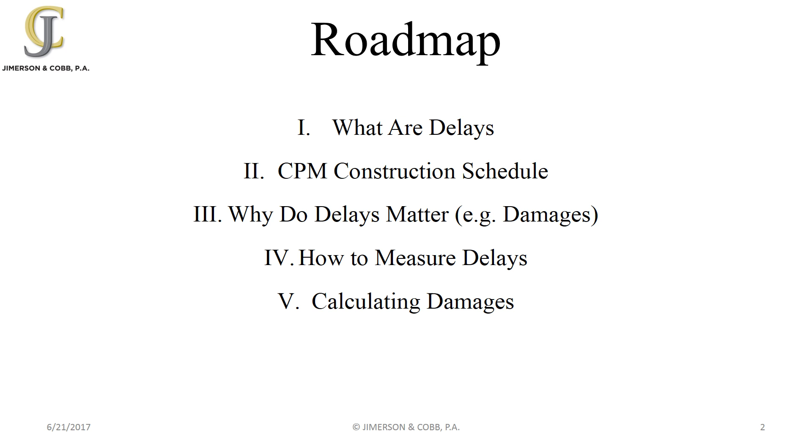Next, we'll examine why delays matter, basically time and money. Then we will endeavor to measure delays and look at the different analysis mechanisms that are available. Finally, we'll get to calculating damages and all the aspects that go into it.

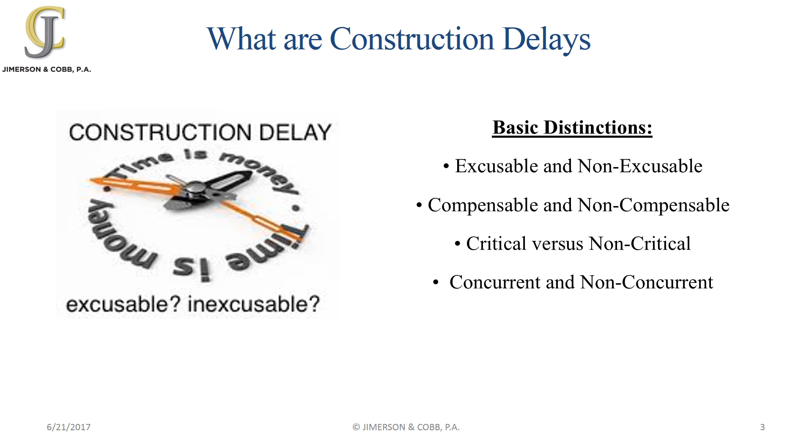So what are construction delays? At the basic level, there are different nuanced distinctions. First, is the delay excusable or non-excusable? You then look at whether it's compensable or non-compensable. A delay is either critical or non-critical, and that makes all the difference. And then, is a delay a concurrent delay or non-concurrent delay? We'll look at each one of these distinctions.

First, an inexcusable delay. This is a delay caused by a party to the project. If you cause a delay, it's inexcusable. You're not going to be compensated for the delay. You're not going to get time, you're not going to get money. In fact, if you cause an inexcusable delay, you're likely subject to a delay claim, such as liquidated damages or an actual damages claim.

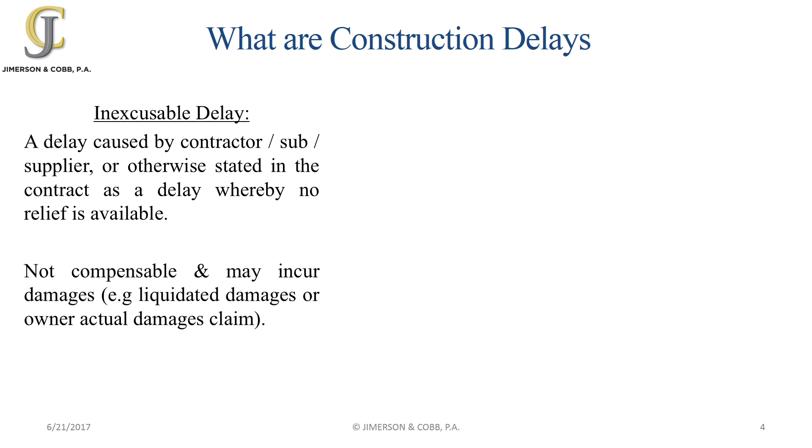Some examples of an inexcusable delay: failure to manage the schedule, inadequate manpower, poor quality, poor safety. You can sum it up to poor performance. If your poor performance causes a delay, it will be an inexcusable delay.

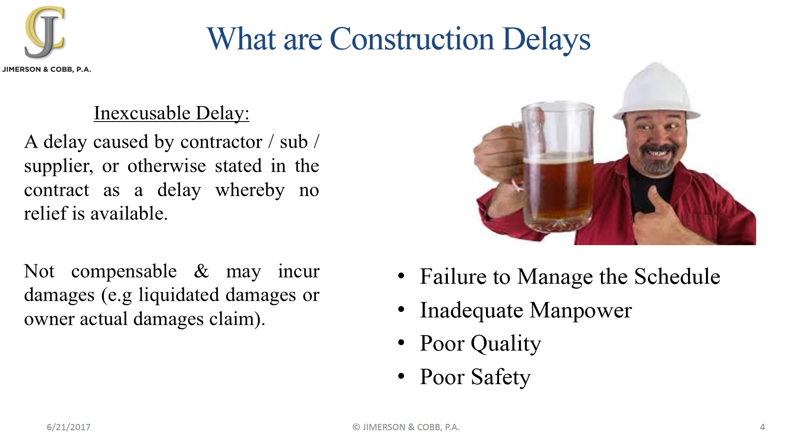Excusable delays are those that are beyond your control—someone else or something else caused it. A classic example is force majeure, such as acts of God, fires, floods. If the owner makes a substantial change to the project that causes a delay, that's excusable. Errors and omissions in the plans given to the contractor by the owner, if those cause a delay, that's an excusable delay for the contractor. Concealed, unforeseen conditions that cause delay are excusable, and most of the time intervention by outside agencies that cause delays will be excusable.

For excusable delays, you're typically going to find that the contractor is at least entitled to additional time. It may not be entitled to additional costs. As we'll see later, it comes down to the contract terms. If an excusable delay occurs on the project, the owner won't be able to assess delay damages against the contractor.

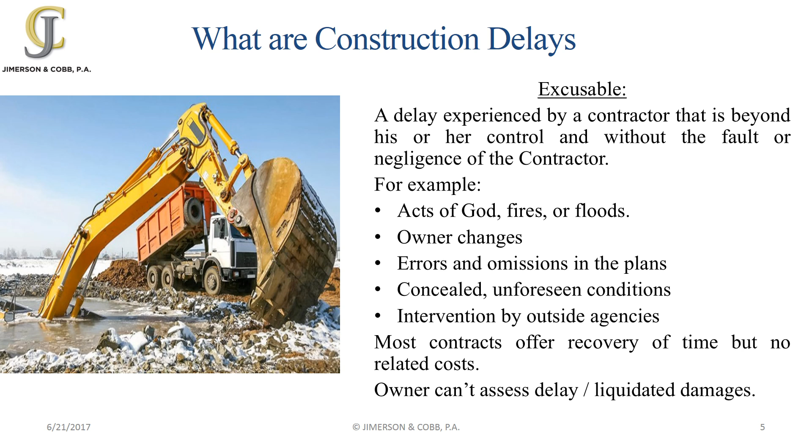A delay claim is either compensable or non-compensable, and we're talking about money—is the party going to have a money damages claim arising from that delay? Your typical non-compensable delay is the type that was beyond the control of one of the parties. So going back to force majeure, acts of God, neither party caused that delay, so you'll typically find those delay claims are non-compensable.

On the other side of that coin, compensable delays—those where a party can seek damages—have some complicated facts they have to prove to support that claim. First, it was a delay caused by the party receiving the work. So if you're the contractor, the delay was caused by the owner. If you're a subcontractor trying to sue the contractor, the delay was caused either by the contractor or the owner.

Next, you have to show that the delay actually impacted the critical path. As we'll see later, delays that don't delay the critical path have no effect. You then must show that the delay was a proximate cause of extra costs. So there's two prongs there: the delay had to be a cause of the costs, and the costs were extra costs that you would not otherwise have incurred but for the delay.

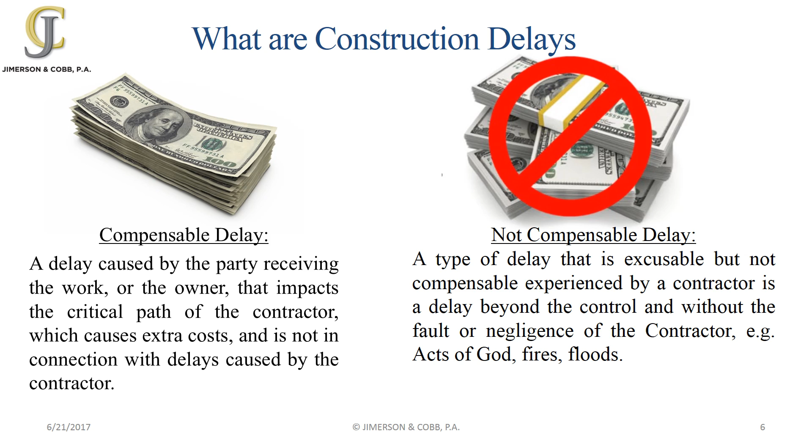And finally, you must show that the delay was not in connection with delays caused by the claimant, the person bringing the delay claim. If they had any fault in causing the delay, they will typically not be able to recover on the claim.

This is a nifty flow chart explaining what we just talked about. Starting at the top, working your way to the bottom. At the bottom, where it says assess delay, that's your money damages delay claim.

So first, was the delay excusable? If it was the type of delay that's non-excusable, there will not be a claim for time or money. If the delay was excusable, is it compensable or non-compensable? If it's compensable, then you've got a claim, likely for time and money.

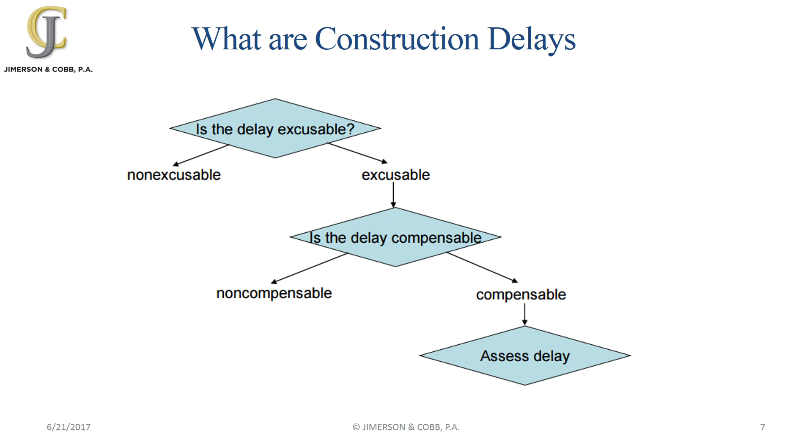The contract between the parties is critical to a delay claim. When drafting or negotiating a contract, the parties should expect that there's going to be delays. In today's complicated construction context, delays are common, and they're best dealt with beforehand when the parties are negotiating the contract.

What I mean by best dealt with in the contract is the insertion of certain claim mechanisms and clauses addressing what damages arise out of the delays and what delays are compensable or non-compensable. A contract can and should determine if certain types of delays will be compensable or not. For instance, going back to our force majeure, is an act of God or rain, even a rain delay, going to be compensable? Sometimes they should be, sometimes they shouldn't.

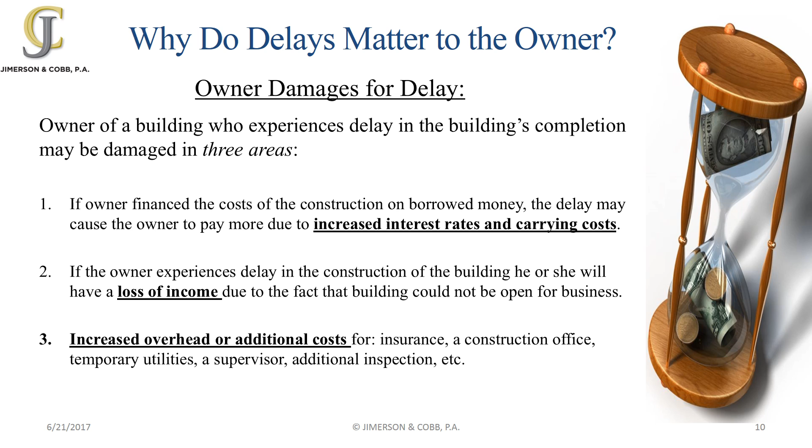Why do delays matter to the contractor? Well, for the same reason as they do to the owner, and as the old saying goes, time is money.

One example would be while the contractor is stuck on this delayed job, they're not able to go out and take those forces and work on another project that would be profitable and undelayed. So that lost profit is a consequential damage that can arise from a delay.

The direct costs are very self-explanatory: the labor used to install and construct the project, the permanent materials actually incorporated into the project. So what does a delay have to do with that? Well, the cost of materials can rise. Had the contractor been able to purchase the materials as planned, they may have been able to purchase them at a lower price. Price escalation, material price escalation.

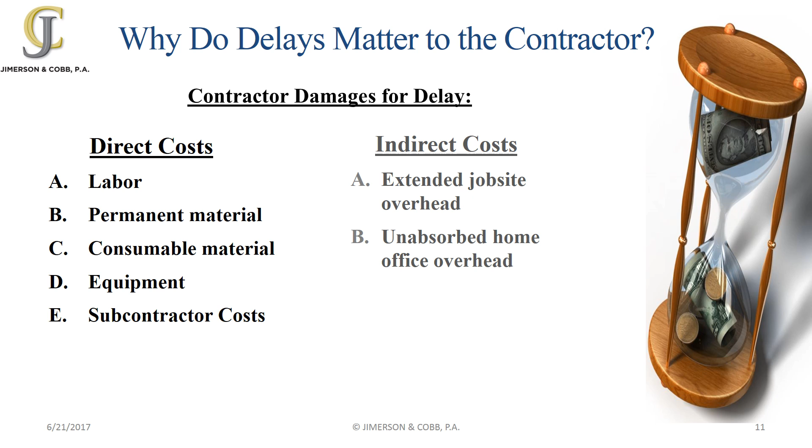So we've been talking about delays, and you've got to understand the construction schedule if you want to understand measuring delays. The key terms involved in construction scheduling would start with the activity, that's the item of work that is being performed.

There's predecessor and successor activities. This is best described by examples. So if your activity is foundation, installing a foundation, and then another activity is installing a wall that sits on top of that foundation, the foundation has to be installed first, then the wall can be installed. So the foundation is the predecessor, the wall is the successor.

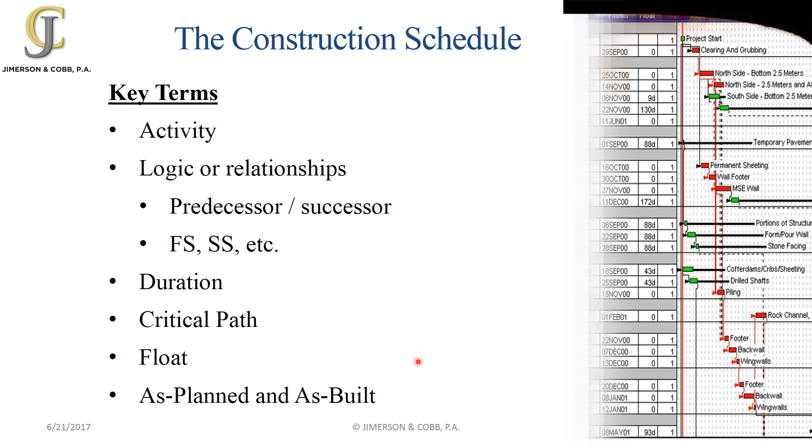This is an example of one of the typical softwares that are used in the construction industry for construction scheduling. It's not the best, most clear example, but this is a Primavera project planner, or P3, and it's just shown to give you some familiarity of what to look for.

Again, it's not very clear, but some of the information that's important here is your activity. Each line is an activity, and that's the name that describes it. Then you have columns, and ordinarily your first column is going to be the original duration. That's your as-planned duration. That's where the parties' rights arise from that duration.

Next, you'll typically have actual duration, which is where you can come in and provide updates as the project progresses—how long did it actually take. Then you've got the start date, finish date, and then there's this line in between the tabular information and the graphical information. I point that out because in the software, you can slide that over, in other words add more columns. The columns could be in there and just may not be shown on what this print view is, but there's some critical information that's not showing up on this printed schedule.

So now, when we endeavor into our delay analysis, this critical information that the delay expert requires is shown. He's not having to make an educated guess.

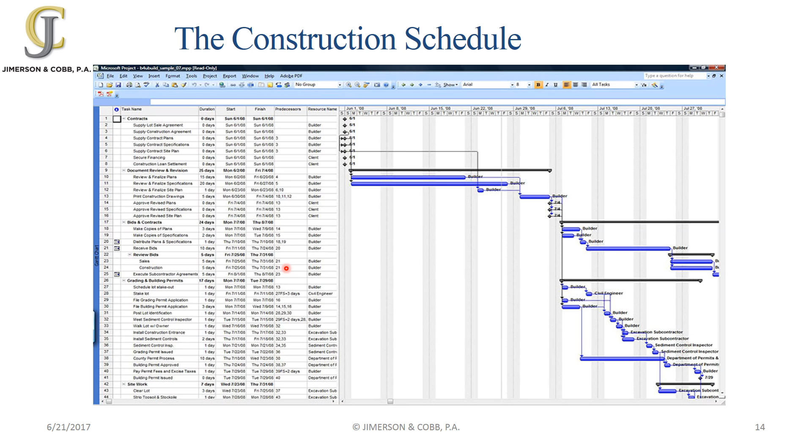The types of schedules that are common today, and the ones that the courts are the most fond of and put the most weight in, is the critical path method, or CPM schedule. The two examples that we looked at on the previous slides are examples of a CPM schedule. And there's a very mathematical underpinning to these schedules.

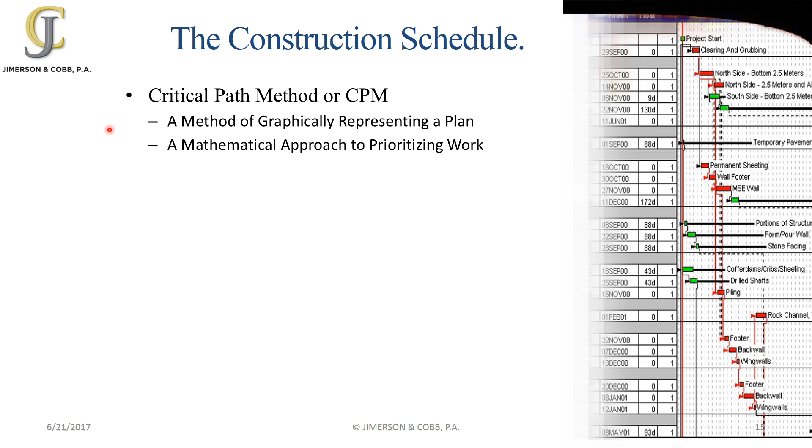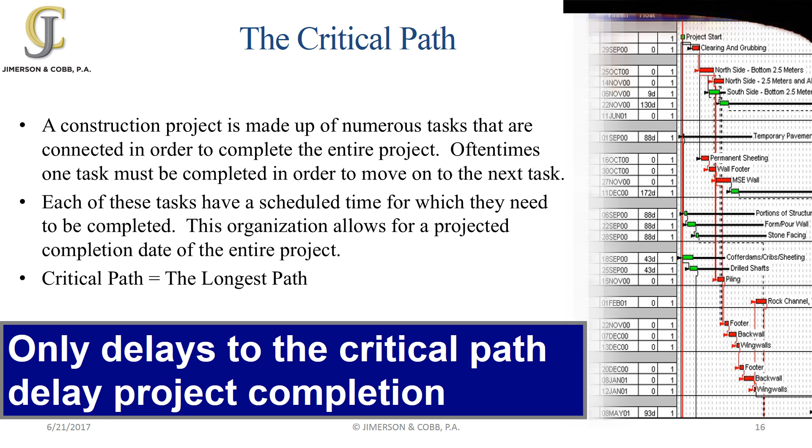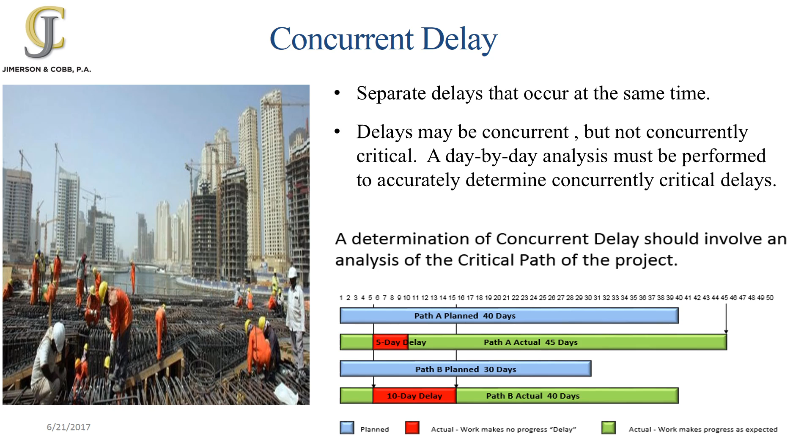Now we turn to float. We mentioned float before, so we won't spend much time with it. But it's the difference between when an activity can start and when it must start, so that the project won't be delayed. If an activity has no float, it's probably because it's on the critical path.

Not necessarily. There are certain mechanisms in today's software, such as constraints, where you can force something to start on a certain date. It'll show up as no float because it has to start on that day, but it may not be on the critical path.

And with float, there's an issue of who owns it, who's got the right to use up that float. And if it's an important issue to you, you need to put it into the contract. Because if you don't write into the contract who owns the float, then it's ambiguously owned by the project, and that means one party doesn't have a right to it.

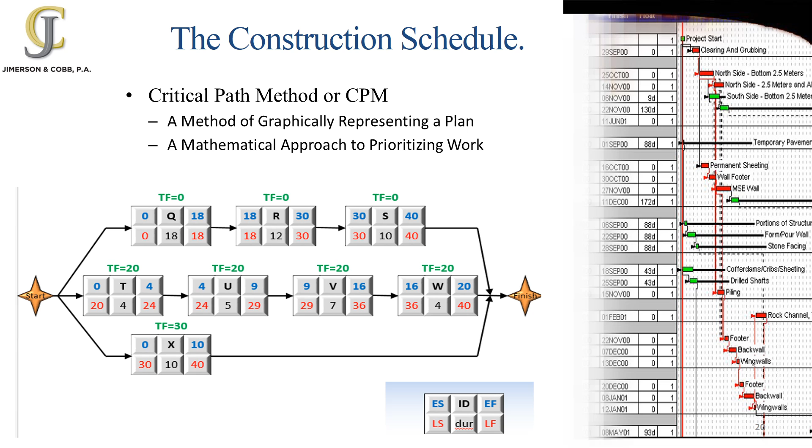We touched on as-planned and as-built schedules previously in the presentation. As-planned schedules, that's the contract schedule. That's what the project was started upon. And the importance there is it's like the baseline. It's what sets the parties' rights. And all claims are compared to that as-planned schedule.

Then when it comes time to make a delay claim, you've got an as-built schedule that needs to be created, or there may have been one created by periodic updates throughout the project, which is good practice. So hopefully there is one, but there's not always. And the comparison of the as-built to the as-planned schedule shows you your delay.

We're getting into soon the different analysis methodologies for analyzing a delay claim. One critical piece is the information that the analyst, the expert, has at its disposal to perform that analysis. The more, the clearer information that the analyst has, the more accurate, more credible, and useful the analysis will be. Ideally, there's good, clear information on what really happened on a day-by-day basis as it applies to the schedule. So we have our as-planned schedule, and hopefully it was updated periodically, monthly at a minimum.

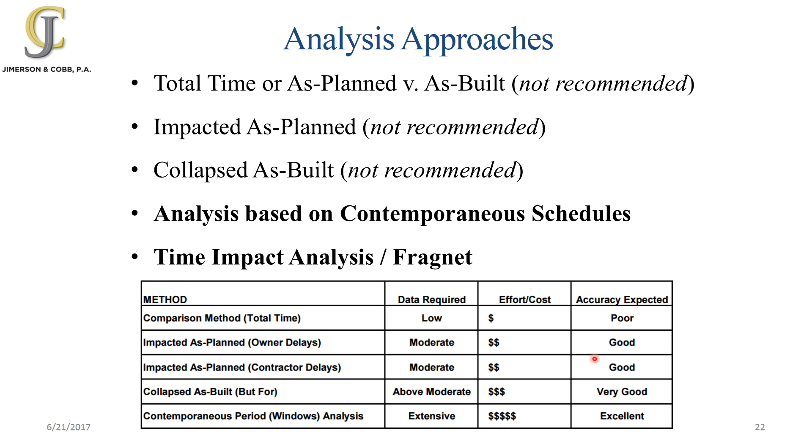We're going to look at each method a little bit. We could spend a lot of time on each method - each one, to fully flesh out, needs probably an hour or so, but we'll just kind of highlight here.

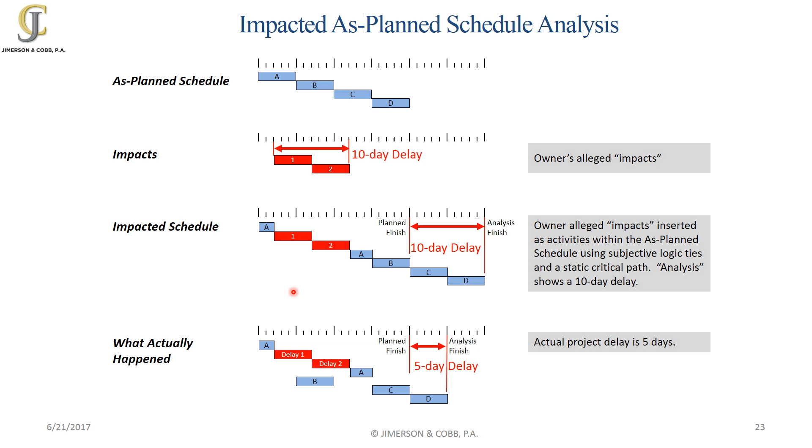So a little bit better than the prior analysis method is the collapsed as-built analysis. Here the starting point is not the as-planned schedule, your starting point is an as-built schedule, built by the analyst using the best data that he can find.

If he's got wonderful data that shows all the logic between the activities and shows the actual durations of all the activities, he may be able to create a pretty decent as-built schedule that fairly represents what actually happened on the project. But many times he doesn't have all the information he needs, so he's got to make some guesses. And because he's got to make some guesses, maybe educated guesses, but still speculation, that erodes the reliability of the analysis, and the courts understand that, and they weigh it accordingly.

A court, under this collapsed as-built analysis, may refuse to entertain the results of the analysis unless it feels confident that the speculations, the guesses that the analyst took to create the as-built, were fair and reasonable and based on sufficient documentation.

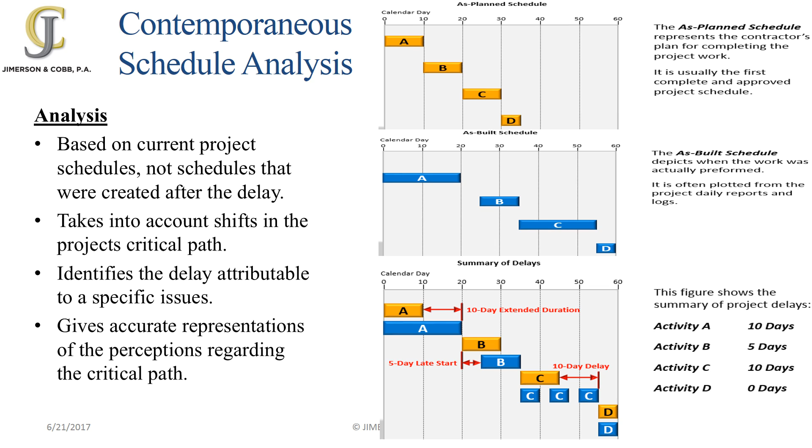Finally, our last analysis to look at is the time impact analysis. There is a retrospective time impact analysis that can be done, but we just want to point out the prospective version, which is done during the project, before a change is executed, or at the moment a delay event occurs. You build that into the schedule at that time and make what's called a fragnet, which shows the added work or delay event and how it ties into the existing CPM schedule.

Of course the analyst, or very likely, and what I would suggest, the project team, the builder, whoever's responsible for the schedule on the project, should be doing this, and they obviously need to use reasonable logic and durations - but who better to do that than the contractor at the time. So you add the fragnet to the CPM when the work was ordered or began, and the schedule update is recalculated to see if the completion date changes. You'll know at that time what effect that particular change or event has on the project completion and on the critical path.

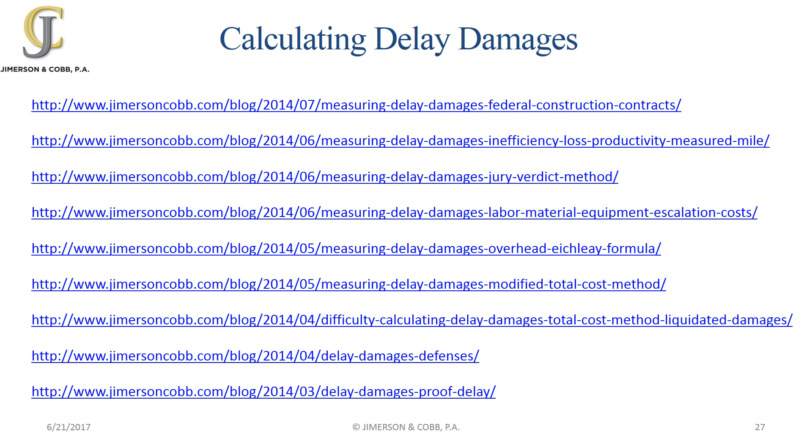So we calculated the number of days of delay, and in some of the less preferred methods, it just gives you one number. It gives you the project delay, overall project delay. Well, it's not reasonable to presume that the one party you're making a claim against was solely responsible for all of that delay.

Construction projects are complex with a lot of people, a lot of moving parts, and everybody has a duty. It's most realistic that for any delay, not just one party is solely responsible for it, that other parties caused some measure of delay on the project. And courts understand that, and there's a firm rule in the courts that if you can't account for and attribute delay to the responsible parties other than the party you're going after, then it's not reasonable for you to recover on your claim.

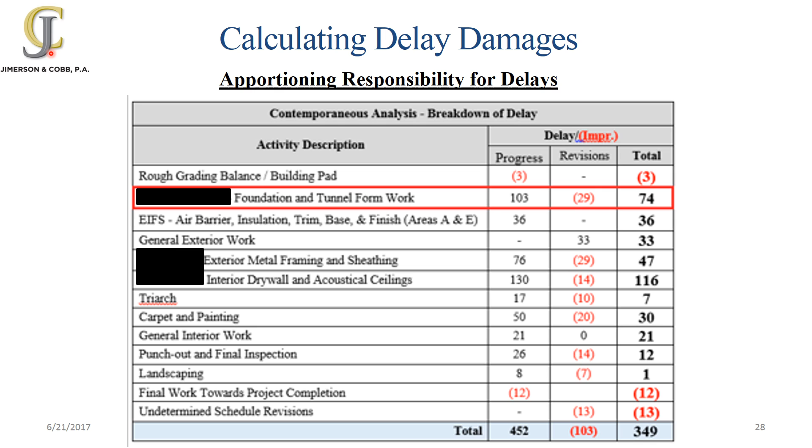It's all about the contract. Don't forget about the contract. So we've figured out how many days there were of delay. We apportion them to the responsible party. Now we pull out that party's contract and read it to see what effect it has on the claim.

First, what's the claim mechanism? Was the claim mechanism followed? If there was a limited amount of time to make a delay claim, was the claim made within that time? Was the claim made in a writing that meets the specificity requirements of the contract? A contract can say that a claim must be made by written notice that adequately describes X, Y, and Z. Well, go back, pull out the file, let's look at the documents. Did you do that? If not, you may not have a claim, because the courts do enforce these claim mechanisms, even if they seem harsh.

Unless you can show that by the course of performance of the parties there was a waiver of that requirement. Then we look to see if delays are compensable or not. If delays are not compensable, you don't have a claim. What type of delays are compensable? Is that the type of delay that we have here?

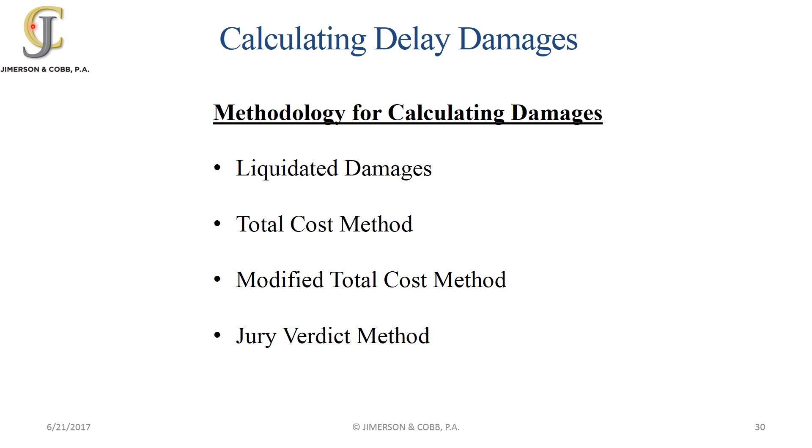Liquidated damages is a concept that can be written into the contract, and it is designed to replace actual damages. So it is a methodology to calculate, or at least provide a way to easily calculate damages. Keep in mind that proving actual damages is a momentous task. It takes hours and hours of document review and intensive fact searching, and quite a high burden in having to prove that at trial.

Not to mention the fact that you'll most likely have to engage an expert witness to review all the documents related to cost and provide an analysis and then testify to the court. All that can be avoided by a good liquidated damages provision, and that's really the concept.

Some contractors and subcontractors have a natural aversion to it. They think, ooh, liquidated damages, no, I won't accept it. Well, if they understand it, then they can see it as a benefit. If negotiated properly, it can be quite a boon. They can dramatically limit their damages.

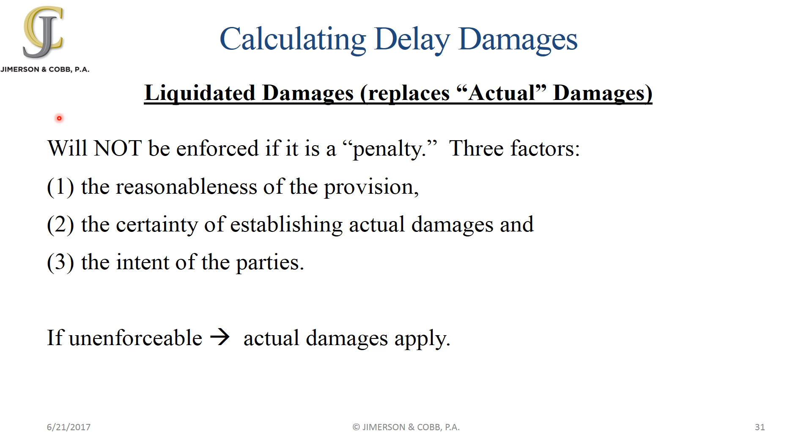Turning now to the actual damages, if you're in a case where you have to prove up your actual damages, what's traditionally called the total cost method, it's less reliable. It's not what courts like to see, and they're only going to give it any degree of weight if there's no other more accurate means of determining damages.

Put simply, the method is you take your actual costs that were incurred and you subtract your original estimate of costs. The difference is the damages.

By way of example, you had a contract for $1 million, part of that being profit. Your cost that you originally estimated were $800,000, assuming no delay, that's the amount of cost you would have incurred throughout the project. However, the project was delayed and you ended up spending $1.2 million, so $400,000 more than what you estimated. That would be your total cost method approach.

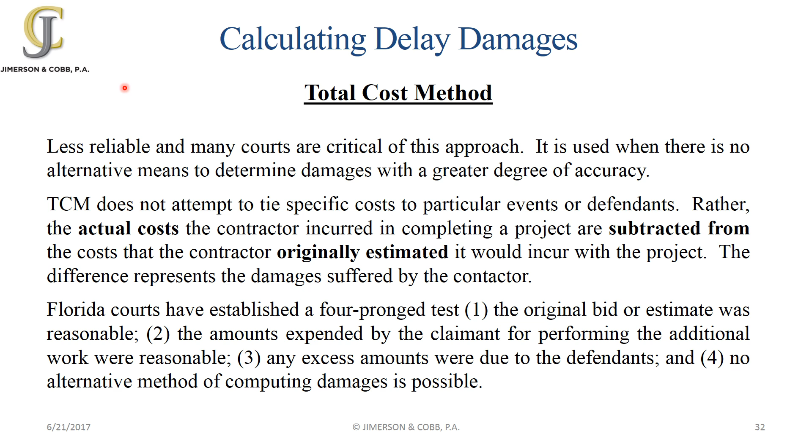The next damages calculation methodology we're looking at is the modified total cost method. It's generally accepted by the courts, and in essence it's a compromise between the total cost method and actual cost data, where you segregate specific damages to specific instances.

If the actual cost can be accurately determined, then that's the best approach. But you're going to use these other methodologies when you can't accurately prove up the actual cost. This modified total cost addresses a couple of the shortfalls of the total cost method. It addresses the reliance on the claimant's estimate, and makes adjustments to bring it in line with what's reasonable.

For instance, you could look at the claimant's price in comparison to all the other bids. If it was in line with all the other bids, then the price is probably reasonable and doesn't need to be adjusted. But if the price was 20% lower than the next bidder, it probably needs to be adjusted, because the estimate may not have reasonably reflected a reasonable estimate, so we need to raise it.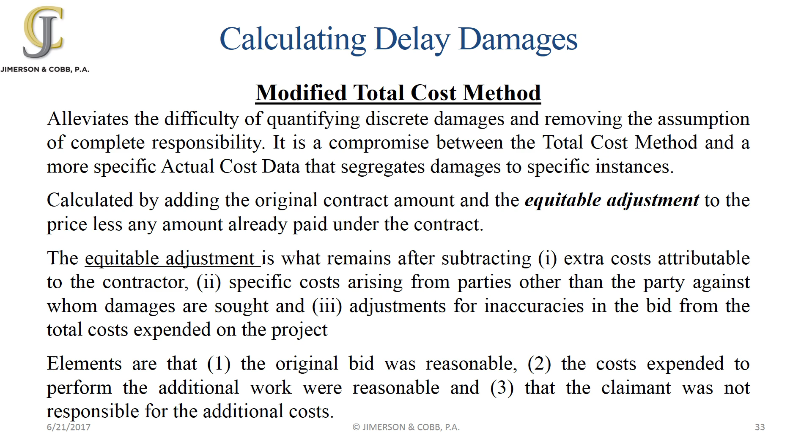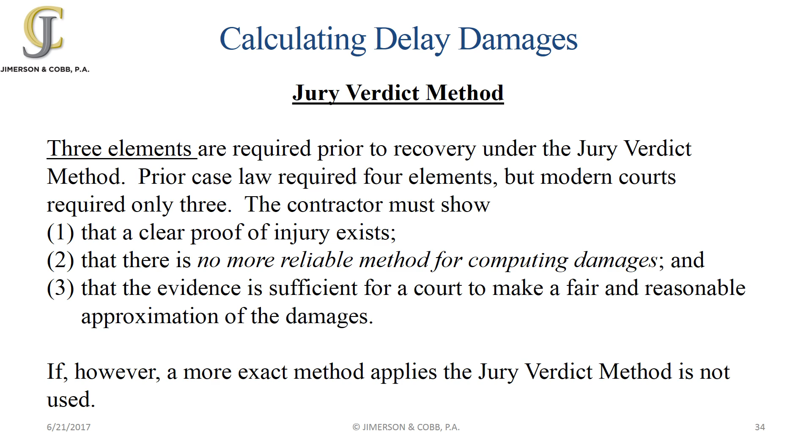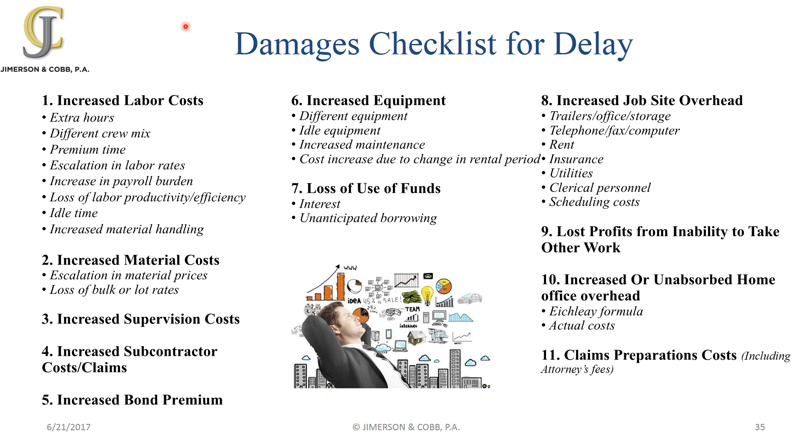Nearing the end, I just want to leave you with a few things. Here's a checklist for the case of a delay claim. Refer back to this. These are the types of costs you need to be looking for and pulling information on to include in your claim. No need to go through these now, just wanted to give it to you for future use.

Last but certainly not least, some proactive advice. These are the things contractors or subcontractors should be implementing in their projects to shore up their potential for claims, in the event that someone does cause them delay, so they'll be able to succeed in their delay claim. This is really important because delay claims can be quite costly to pursue in legal fees and expert fees. You don't want to pursue a claim, expend all the fees, and then lose because you just didn't have the evidence.

You didn't have the best information to do the best analysis. You were stuck, you didn't have enough information to do a contemporaneous delay analysis, so you were stuck doing one of the lesser approaches, and the court said no, we're not going to give any weight or credibility to that report because it's just too unreliable. So here's some advice.